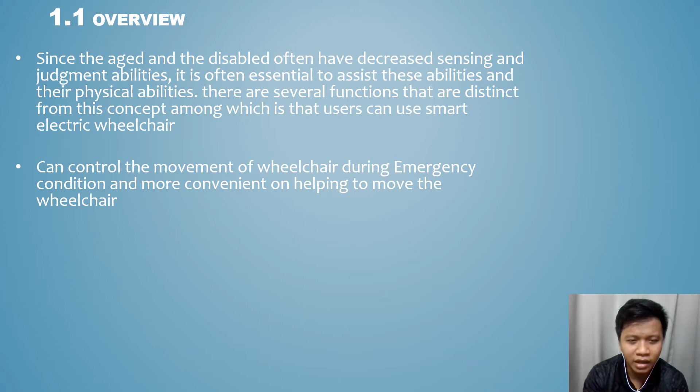I want to talk about introduction. For the overview, since the aged and disabled often have decreased senses and judgment abilities, it is essential to assist these abilities along with their physical abilities. There are several distinct functions from this concept, among which you can use a smart electric wheelchair. First, it can control movement of the wheelchair during emergency conditions, making it more convenient to move the wheelchair. Secondly, it can receive an emergency alert from an emergency button, check wheelchair position, and track users' simple health history and vital signs. Lastly, it provides IoT and big data for the system.

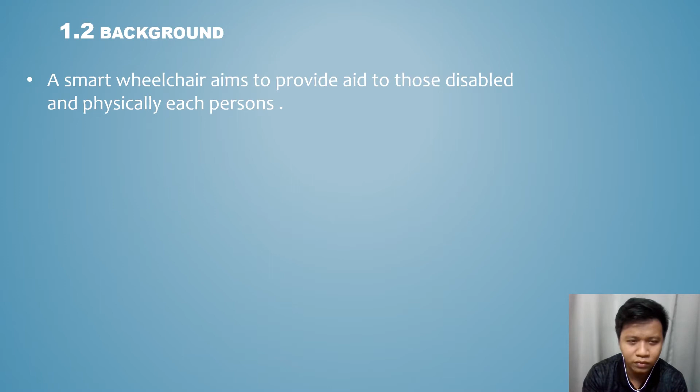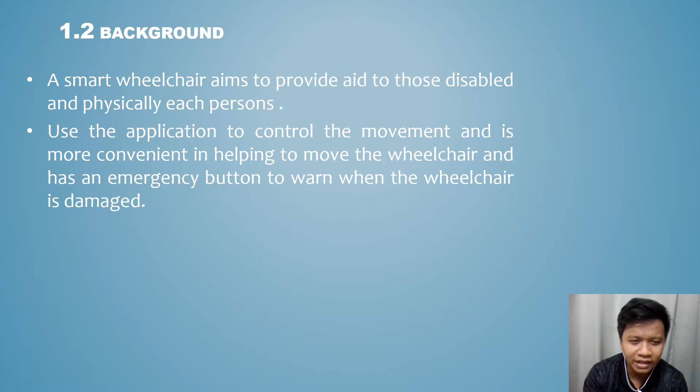For the background, a smart wheelchair aims to provide aid to those disabled and physically aged, using an application to control movement, making it more convenient to help move the wheelchair. It has an emergency button to warn when the wheelchair is damaged. Lastly, a dynamo electric generator is also used to power it, reaching the goal from SDG number 7, which is affordable and clean energy.

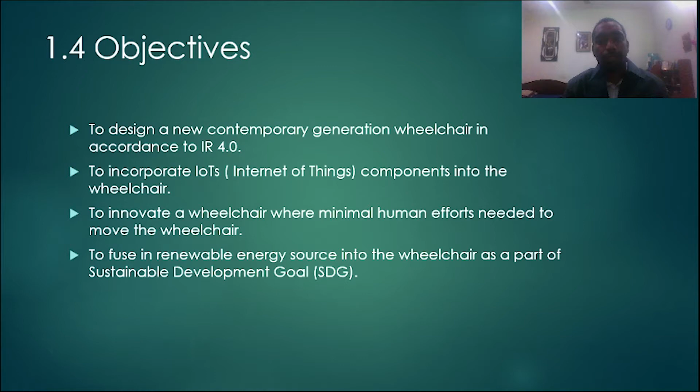Next is the objective. We are going to design a new wheelchair with a contemporary design according to Industrial Revolution 4.0. We are going to incorporate Internet of Things into our wheelchair, creating one where minimum human effort is needed. We are also going to fuse in renewable energy sources as part of the Sustainable Development Goal.

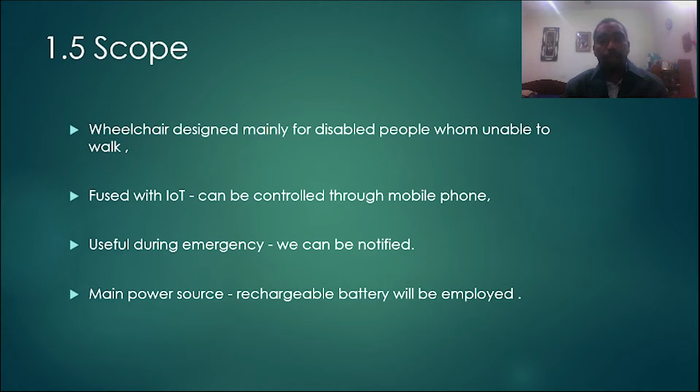For the scope, we are mainly focusing on disabled people who have difficulties walking. We are going to infuse IoT, controllable through a mobile app, which will be useful during emergencies or accidents since we can get notified. We are also going to use a rechargeable battery as our main power source for the wheelchair.

Benchmarking is basically taking several products available in the market and making a comparison based on listed categories: dimension, material, weight, loading capacity, batteries, warranty, power, driving range, and cost. This comparison makes clear what is needed in our product, which is why we call it benchmarking.

This survey was done using questionnaires, divided into 5 sections. The first section is personal information of the person with disability. The second section is general overview, where we ask questions to collect basic data regarding the person with disability. In the third section, we ask about the problems they face with the equipment they use. In the fourth section, 6 solutions are suggested, including newly invented functions of the wheelchair. The last section highlights products along with opinions and requirements.

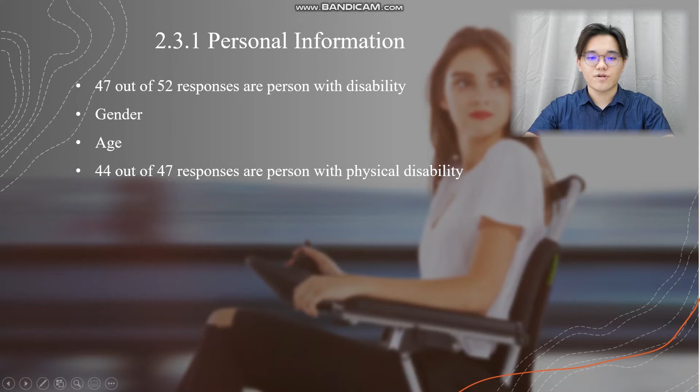In personal information, we found that 47 out of 52 responses are persons with disability. In this session, we collected data on gender and age of respondents, and found that 44 out of 47 responses are persons with physical disability. In the general overview, we collected data on the equipment they use the most during daily life.

Time taken to use the equipment mentioned above per day, whether they use a smartphone, and so on. All the questions in this session are multiple choice questions, with one open-ended question.

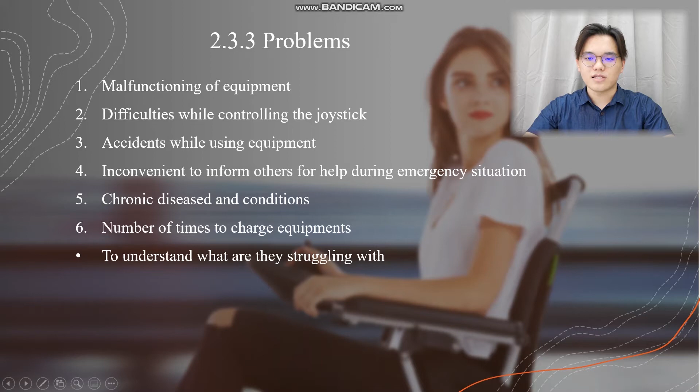In the problem sections, we collected data such as malfunctioning of equipment, difficulties while using the joystick, accidents while using the equipment, and so on. This helps us understand what they are actually struggling with.

In the section of solutions, we use Likert scale type questions on the survey. A total of 6 solutions are suggested in this part for the newly invented function of the wheelchair to solve the problems faced by users regarding IoT. The 2 functions with the highest responses on agree and strongly agree will be added into the respondent requirements section.

In respondent opinion and requirements, we also use Likert scale type questions. In this session, we collected data such as lightweight, high weight capacity, low power consumption, and so on. The 2 most voted functions from the above section will be included in this session.

They will be more focused, and consideration may be given based on the variable most voted on. By accomplishing this function of ranking, the further process in design would be much easier.

For chapter 3, we talk about the design specification. At 3.1, design parameter identification, we have the calculation of the important weight factor. This important weight factor has 9 characteristics, and if you want more detail on this, you can refer to the report. Moving on to the House of Quality, HOQ.

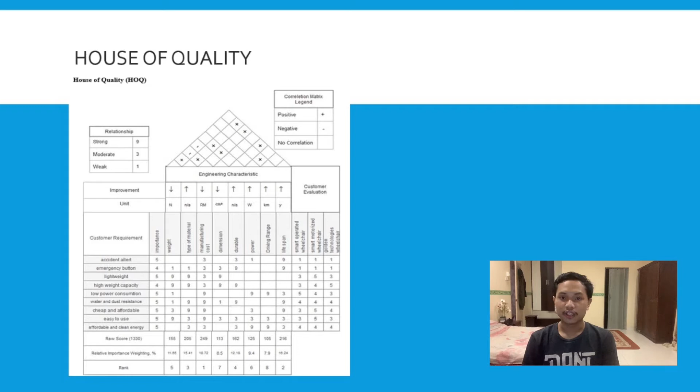Moving on to the discussion of customer requirements. In this table of discussion, we discuss each type of customer requirement that is included in our project.

As for the product design specification, it is known as a smart electrical wheelchair system. It will alert people in case of any emergencies or accidents. As for the key features, it has an accident detection feature, and it even has an emergency button. It's a water and dust resistant wheelchair, and the power usage is also very efficient, and it's lightweight and durable.

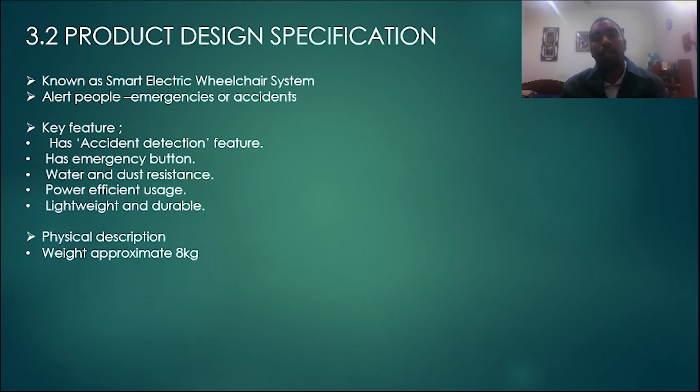It weighs around 8 kilograms approximately. For the performance target, it has a high weight capacity and uses a low power consumption motor, and it's cheap and affordable. It's easy to use, and it uses only clean energy for the power system.

Other than that, you don't need much requirement or knowledge, since we'll provide a quick user guide and also an owner's manual. Our target market is people with walking disabilities, hospitals, health centers, and so on.

We will brand our wheelchair as SEWS. We assume that our manufacturing cost is 700 ringgit, but we recommend selling it at 1000 ringgit. And for our manufacturing spec, we will produce the wheelchair in-house, and the suppliers for the parts will be local suppliers.

Thank you. Chapter 4, Concept Generation. 4.1 Overview. The overview of this chapter: first we will look at physical decomposition, where we will dissect the device into smaller parts to get a better idea of the components of the project. Second, functional decomposition, where we will produce the function structure.

Third, functional basis. Fourth, systematic design. Fifth, function block. And sixth, function structure.

4.2, design goals and constraints. The main goal of this project is to help people with physical disabilities move freely and become more independent. Second, we want to incorporate the element of IR 4.0, which is the Internet of Things, into our project. Third, we want to incorporate SDG 7, affordable and clean energy, into our project.

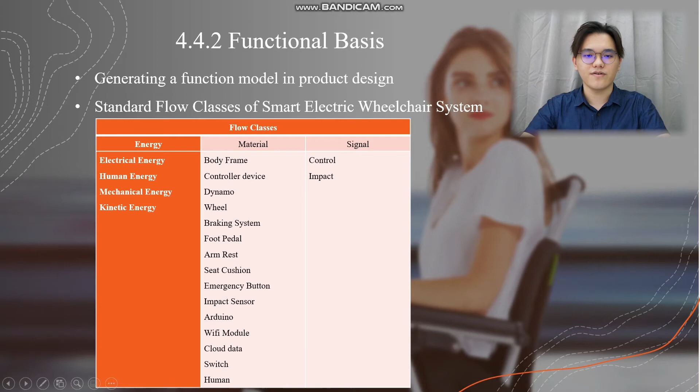Next, we continue to systematic design. The system interacts with its user and the environment by exchanging the flow of energy, material, and signal with them. Figure 4.2 below shows the black box of the system. It starts from human energy giving input signal as instruction and electrical energy as the power supply, to give output in mechanical energy and kinetic energy as motion thrust and directions.

For the safety of the user, a smart system is installed in this electric wheelchair. This system includes an impact sensor and emergency button, which could sense impact and emergency situations and send out notifications to the mobile application by using IoT.

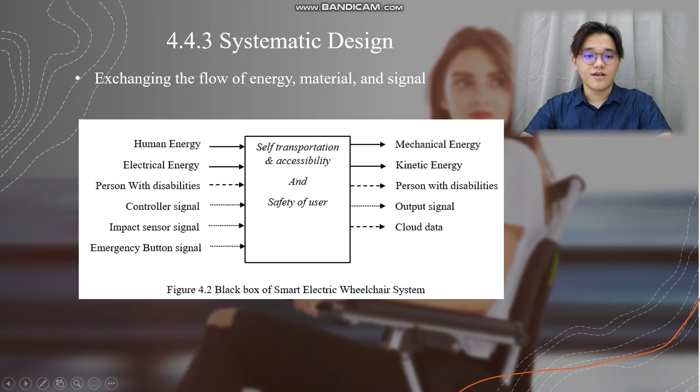4.5 Morphological chart. Morphological chart is a way to generate ideas and create concepts based on the components that we want to include in our project. In our morphological chart, we have 14 components that we want to incorporate in our project. So in each concept, we have several ideas based on the available components that we are referring to in the available market.

As for the context diagram, our wheelchair is divided into 5 elements: first the user, second the power supply, third the environment, fourth maintenance, and lastly the Internet of Things. The user is the disabled people, and the power supply will be dynamo as secondary and rechargeable battery as primary. For the environment, we will use a clean and affordable power source system.

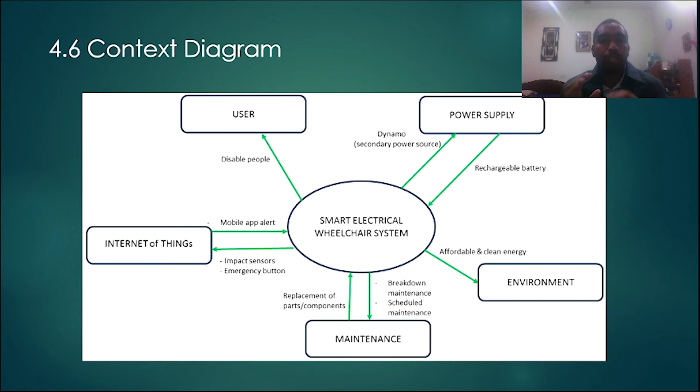For maintenance, it is only when the wheelchair breaks down. And for the Internet of Things, we only use an impact sensor and emergency button, and in return it will notify us through the mobile app.

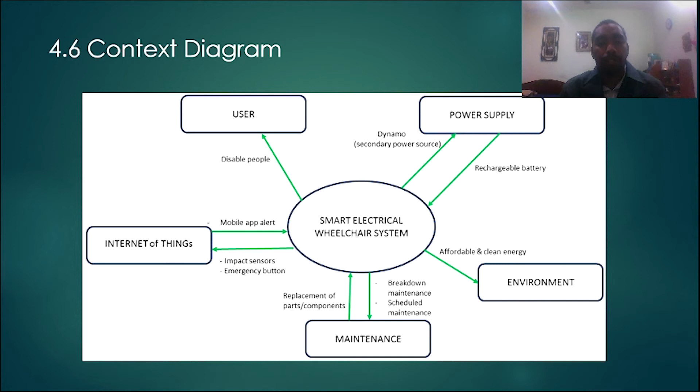For the physics of design idea, the first is weight force identification. We need to identify this, so we use the formula F equals m times a, where F is the force, m is the mass, and a is the gravity acceleration.

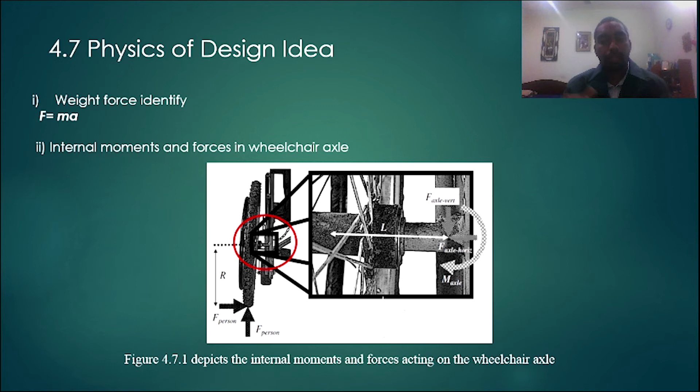Second is the internal moment and forces in the wheelchair. We need to know the internal moment and forces in our wheelchair so that we will know where the shear stress, fatigue, and so on occur on the wheelchair.

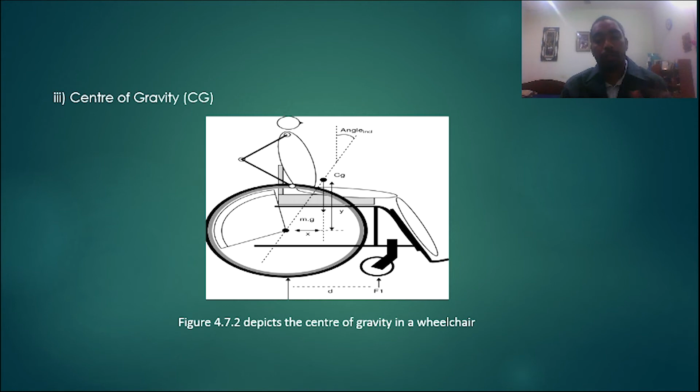Next is the center of gravity. In order to find the correct balance of a wheelchair, we need to know the center of gravity for the wheelchair. Lastly will be the characteristic of metals.

Before we use any metals to create the body or the frame of the wheelchair, we will need to know the yield strength of the metals so that we can choose the right metal for our wheelchair. Thank you.

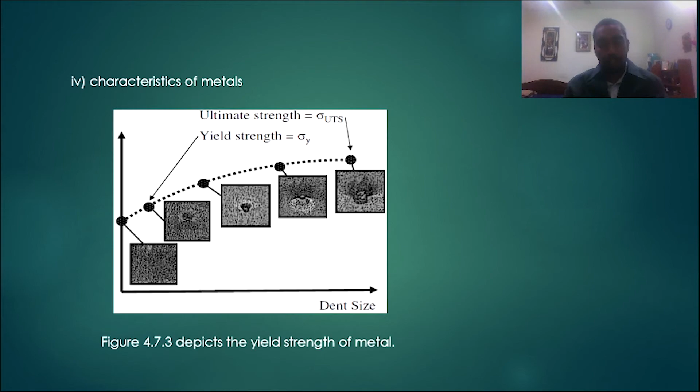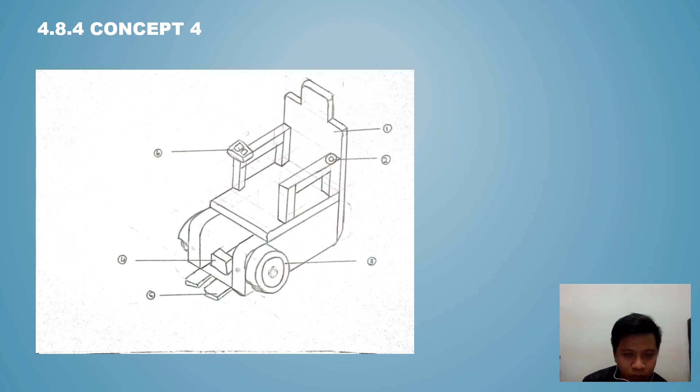This 4.8 is the concept design, and this is concept 1. This is concept 2, and this is concept 3, and lastly this is concept 4. If you want to find more details of the 4 concepts, you can refer to the report.

As for the design parameters and constraints, we will make sure our design is ergonomic and will be concentrating on the sitting position, arm placement, and foot placement. For safety, we'll be applying a seat belt and also making sure there's a safe harness installation.

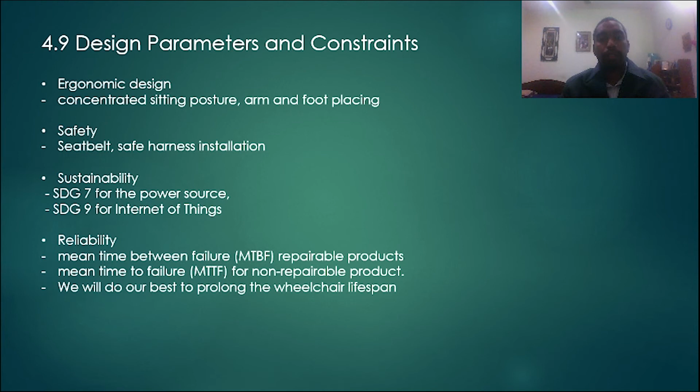As for sustainability, we'll be focusing on SDG7 for the power source and SDG9 for the Internet of Things. As for reliability, we will be using mean time between failure for repairable products and mean time to failure for non-repairable products. We will make sure our wheelchair lasts long.

As for the pocket-friendly maintenance, we will be using high-quality components and high-life batteries. Electronic components that we use will be cheap to replace. We will focus on materials which are light, opting for a light material for our wheelchair.

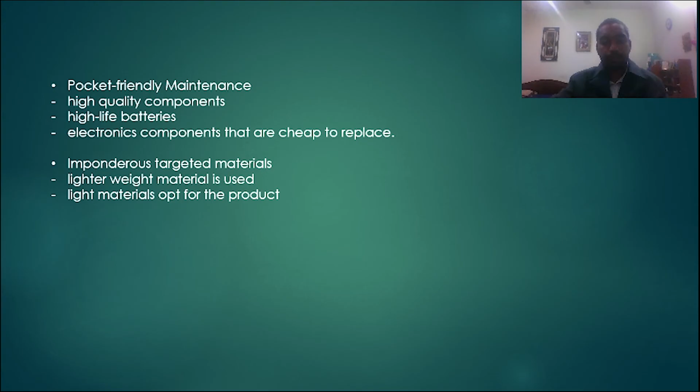Next, we proceed to Chapter 5, Conceptual Design. This chapter discusses how to make appropriate decisions using decision-making methods, namely the Pugh chart and weighted decision matrix. Through this method, the final decision can be made from all the alternatives generated from the previous chapter. Decision influences both the direction of the process and the definition of the product. Decision makers adopt the decision-making process to select the most logical choice from several existing alternatives. Decision making is classified into 4 groups.

First is decision under certainty, where each action results in a known outcome that will occur with a probability of 1. Second is decision under risk, where each state of nature has an assigned probability of occurrence. Third is decision under uncertainty, where each action can result in 2 or more outcomes, but the possibilities for the state of nature are unknown.

Last is decision under conflict. The states of nature are replaced by courses of action determined by an opponent who is trying to maximize the objective function. Section 5.3, Pugh Concept Selection.

The Pugh method compares each concept relative to a reference or datum. For each criteria, we determine whether the concept is better, poorer, or the same as the reference concept. In Table 5.1, Pugh Selection Chart 1, we take the best product in the benchmark to compare with our concept that we have come up with, and we can identify which is the best concept. In this case, we have identified concept 1 as the best concept, so we can proceed with our project.

To find the best concept, we have done a comparison between the concepts. There are 4 concepts in total, and we have given weightage according to the criteria. As we can see, concept 1 has the highest rating, which is 8.898, and it also scores the highest. So in a nutshell, concept 1 is our best concept since it fulfills all our needs. Thank you.

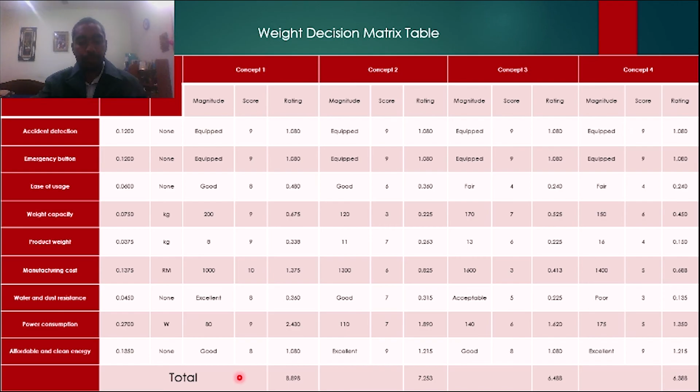Next, we continue to preliminary product design specification. The table shows the updated product design specification with descriptions based on the changes of the product specification. The product identity of this system is to allow users to prepare the wheelchair more quickly and easily, increasing mobility and independence for the user.

The key feature of this system is the ability to ensure user safety by alerting caregivers and family members during emergencies and accidents, using accident detection features and an emergency button. It also contains a dynamo as a secondary power source, used to ensure no mechanical energy is wasted, converting it to electrical energy instead. For other details, Dr. may look into the full report.

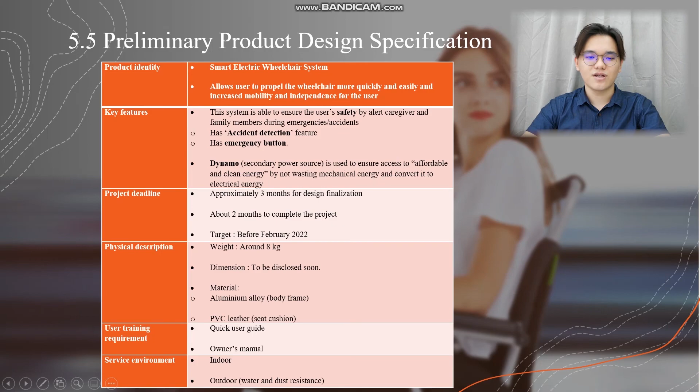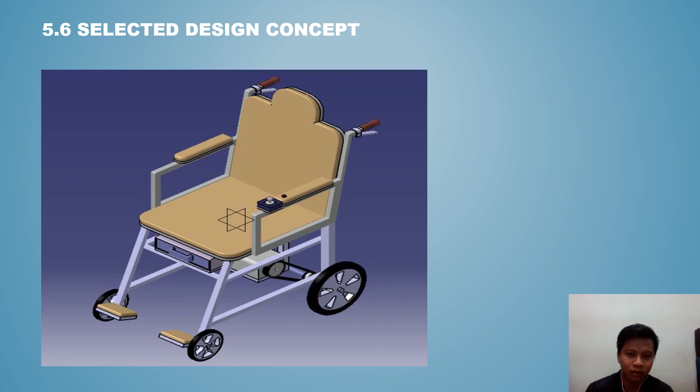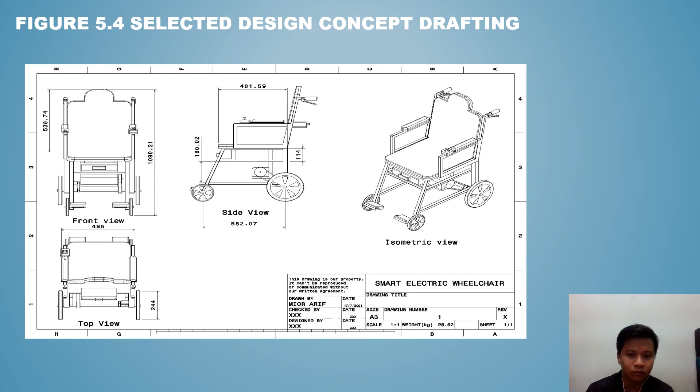The last topic is the selected design concept. This is the selection of the best design concept, with 4 concepts here. This is the drafting concept of the wheelchair. Of the 4 specifications in this project, conceptual design 1 is selected as the final design project, chosen through making complex decisions using the weighted decision matrix and Pugh chart concept selection.

It is selected because it uses a brake system to stop the wheelchair. In addition, it uses a pulley and timing belt connected to a lead acid battery and high torque DC motor to move it. It uses a finger knob joystick to control the movement. It also has 2 footrests and handrests for user convenience, and uses PVC leather material because it's more reliable and good in water and dust resistance.

It also uses a hub dynamo as backup power in the event of an emergency. The frame material uses aluminum alloy because it is lighter in weight and has the advantage of being resistant to corrosion. It uses a tubeless tire because it doesn't get punctures easily, is lightweight, and offers the ability to run at lower air pressure for better grip.